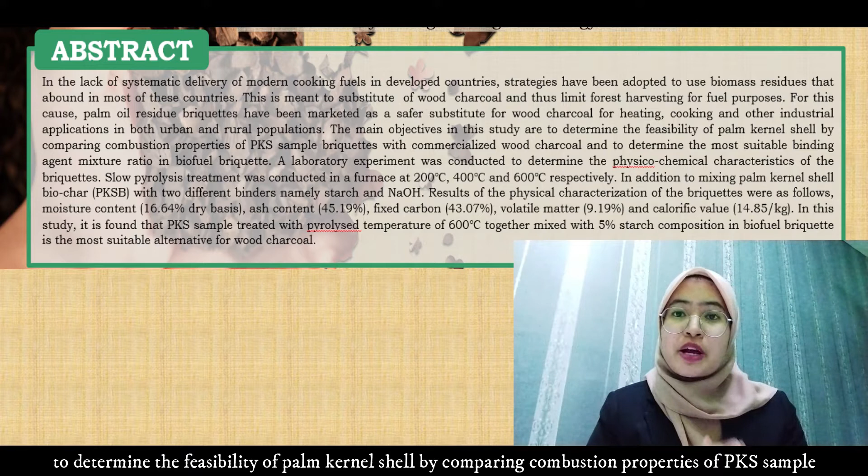Overall, the main objective of this laboratory experiment is to determine the feasibility of palm kernel shell by comparing combustion properties of the briquette sample with commercialized wood charcoal.

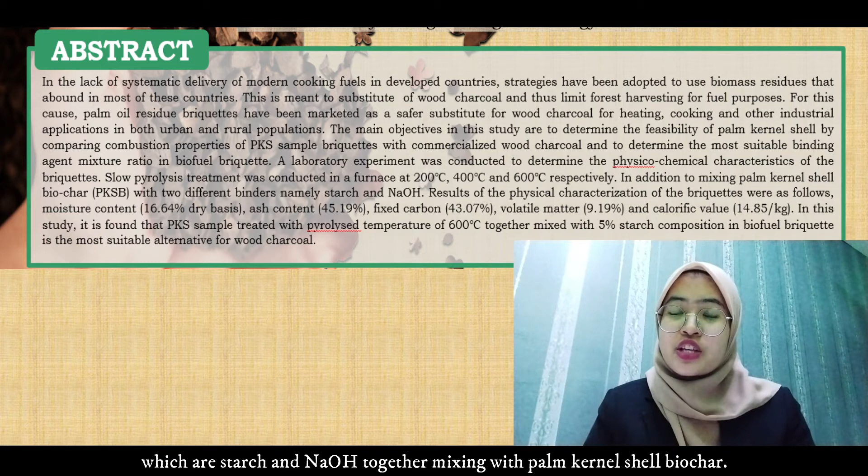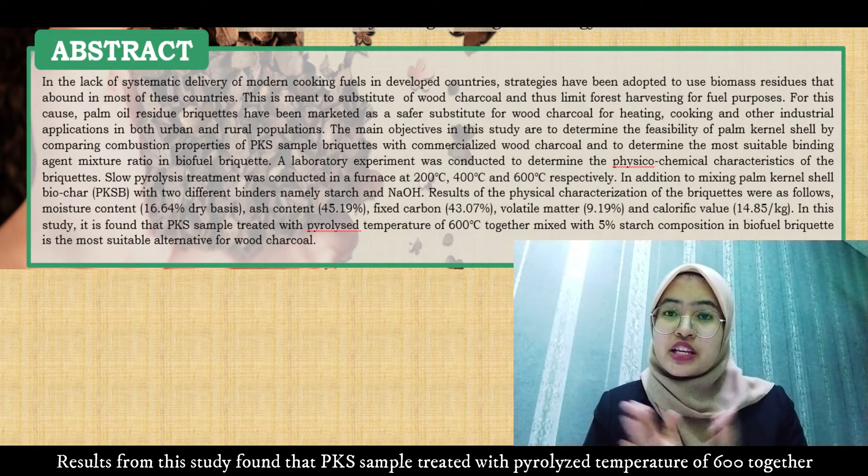In this experiment, I used two different binding agents, starch and sodium hydroxide, mixed together with palm kernel shell biochar. Slow pyrolysis was conducted in a furnace at temperatures of 200, 400 and 600 degrees Celsius. Results from this study found that the briquette sample treated with a pyrolyzed temperature of 600 degrees Celsius together mixed with 5% starch is the most suitable alternative to charcoal.

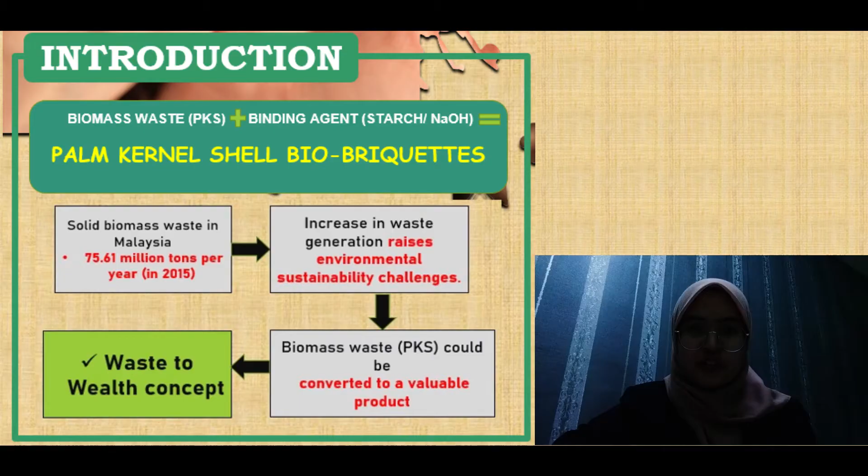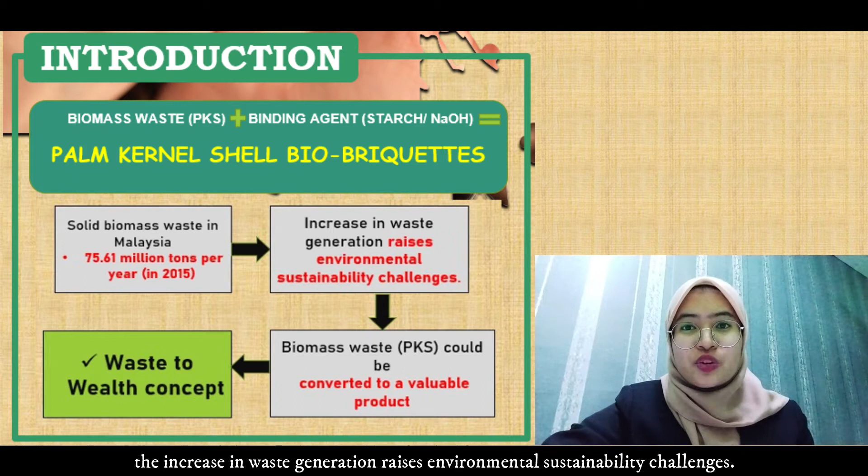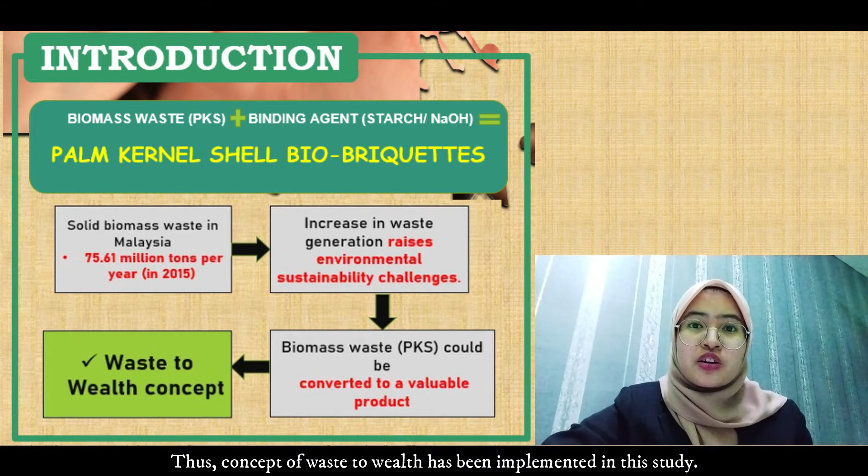For your information, during 2015 Malaysia produced 75.61 million tons per year of solid biomass waste in the palm oil industry. In relation to waste management and greenhouse gas production from solid biomass, the increase in waste generation raises environmental sustainability challenges. Therefore, biomass waste was converted to a valuable product, biofuel briquettes. Thus the concept of waste to wealth has been implemented in this study.

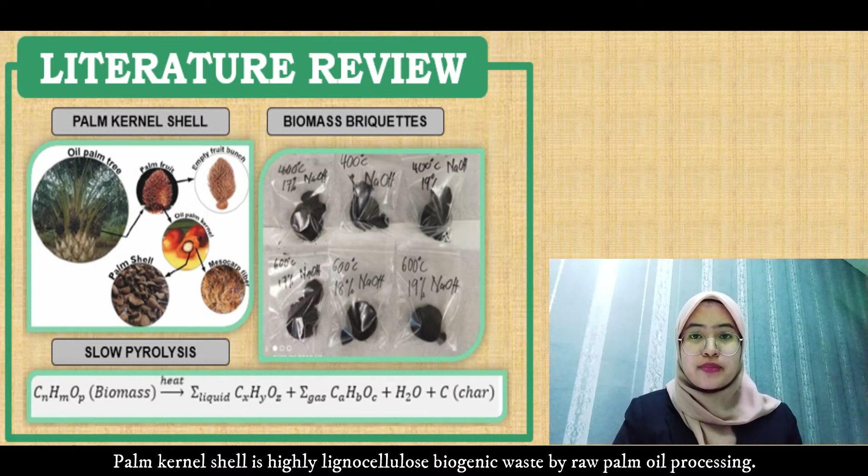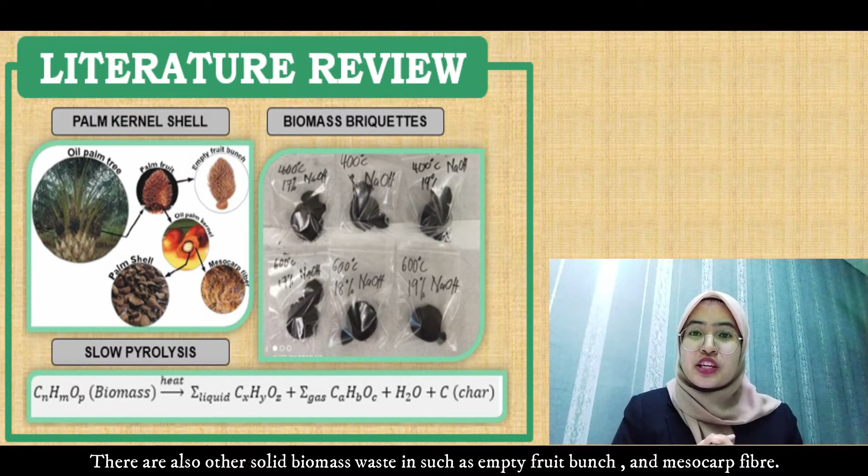Palm kernel shell is a highly lignocellulose biogenic waste from raw palm oil processing. As you can see in this figure, PKS is the hard part containing the palm kernel fruit, which contains the palm kernel seed. There are also other solid biomass such as empty fruit bunch and mesocarp fiber.

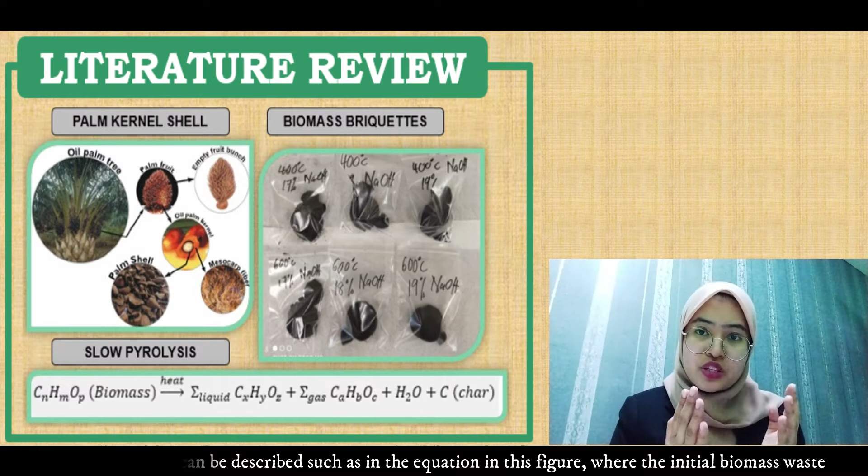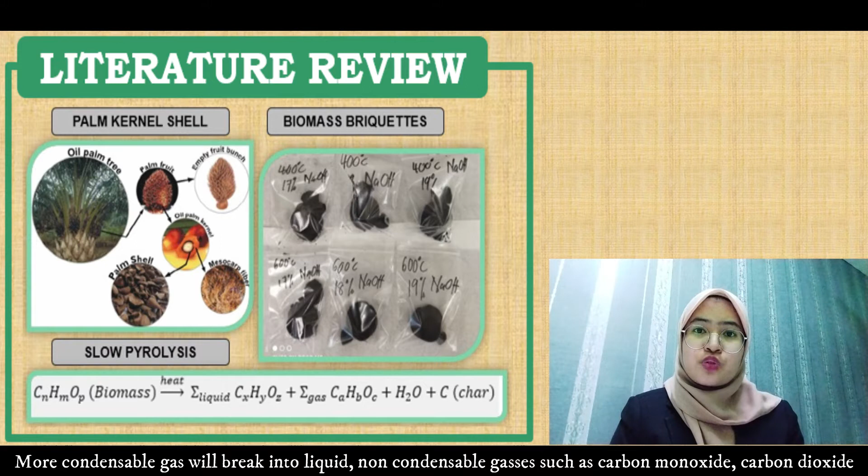Pyrolysis can be described as shown in the equation in this figure, where the initial biomass waste will be heated at a certain temperature and the initial pyrolysis product consists of solid char and condensable gas. More condensable gas will break into liquid, and non-condensable gases such as carbon monoxide, carbon dioxide and methane.

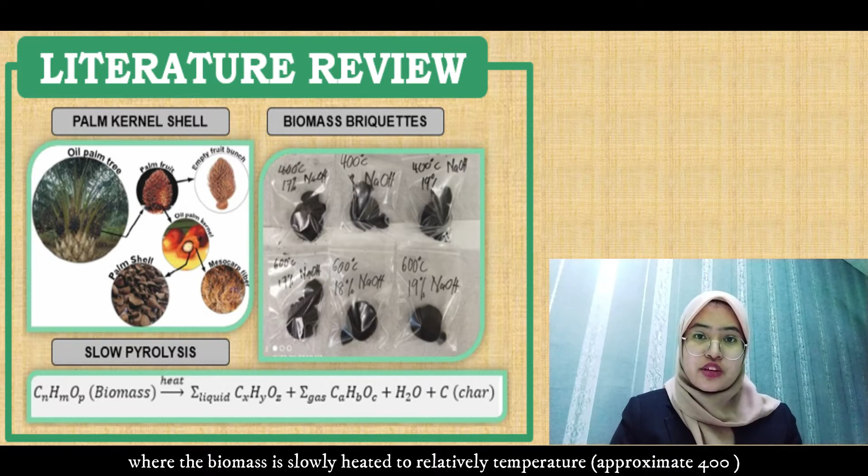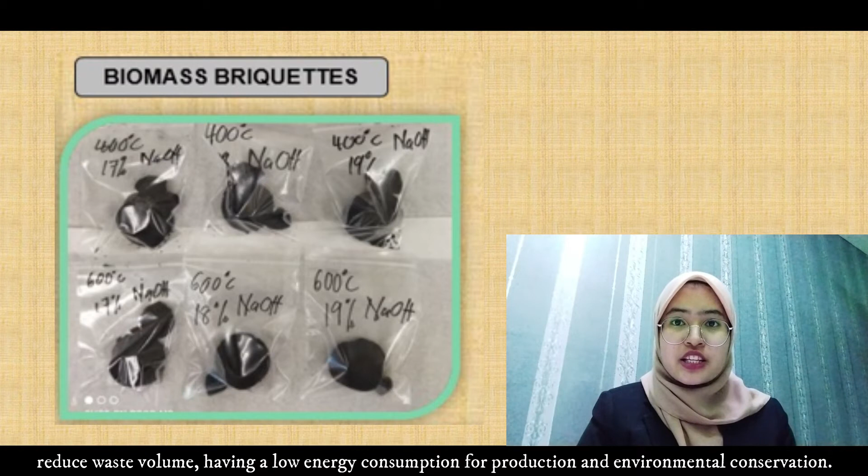Slow pyrolysis is described as occurring in the absence of oxygen, where the biomass is slowly heated to a relatively low temperature, approximately 400 degrees Celsius. The main advantages of briquetting include producing a high thermal efficiency solid fuel, reduced waste volume, lower energy consumption for production, and environmental conservation.

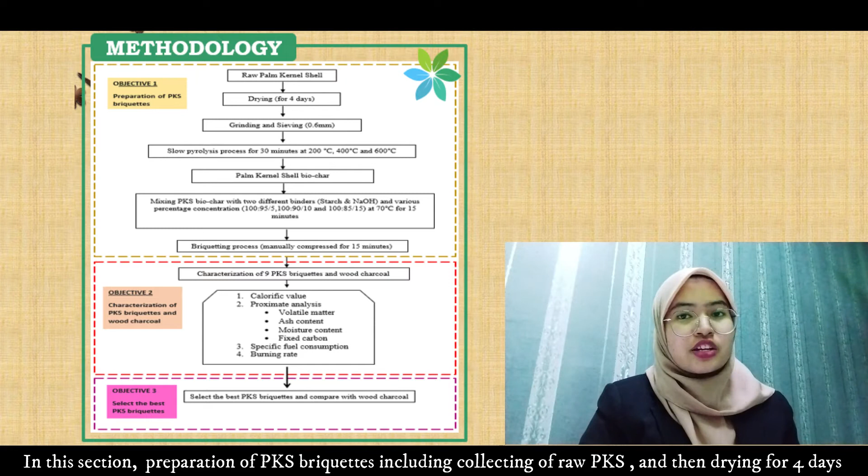In this section, preparation of PKS briquettes includes collecting raw PKS, drying for 4 days, grinding and sieving. Then slow pyrolysis occurs at 200, 400 and 600 degrees Celsius for 30 minutes to produce palm kernel shell biochar.

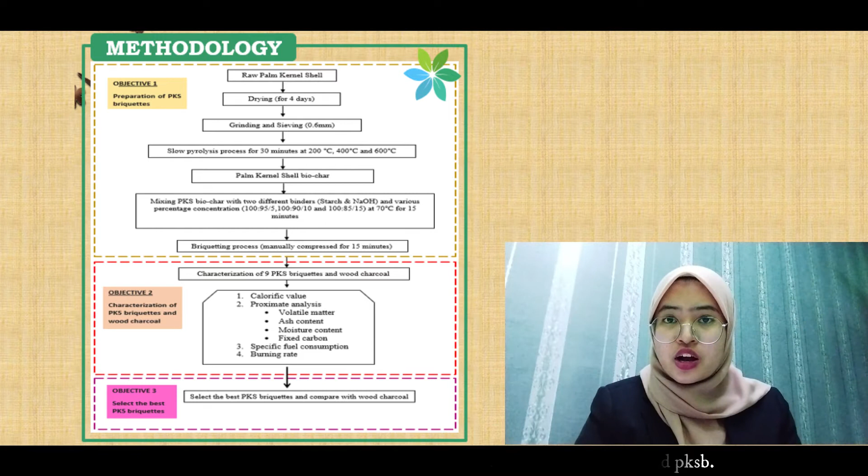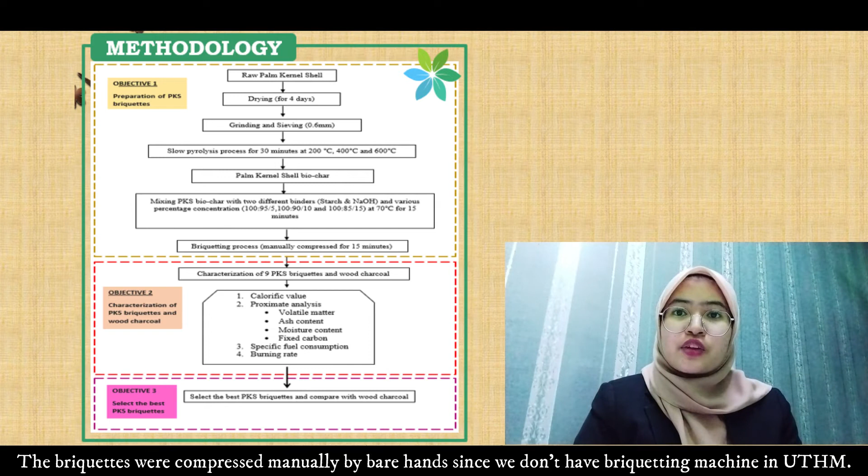Then PKSB will be mixed together with a binding agent, starch or sodium hydroxide, at compositions of 5%, 10% and 15%. The briquette is compressed manually by hand since we don't have a briquetting machine in UTHM.

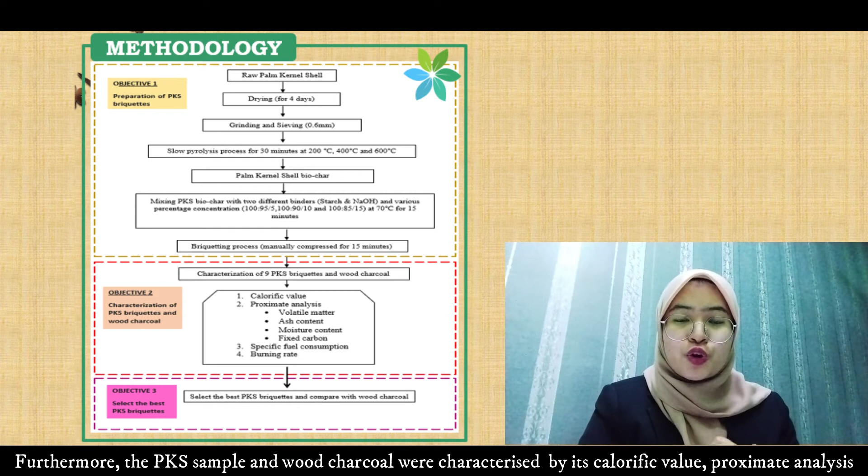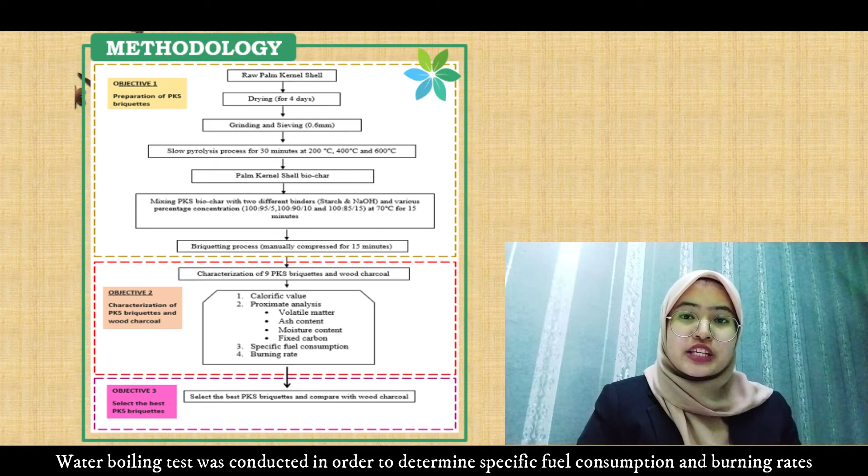Furthermore, the PKS sample and wood charcoal were characterized by calorific value and proximate analysis such as volatile matter, ash content, moisture content, and fixed carbon using thermal gravimetric analysis. Water boiling tests were conducted to determine specific fuel consumption and burning rate. Finally, the best PKS sample was selected and compared with wood charcoal.

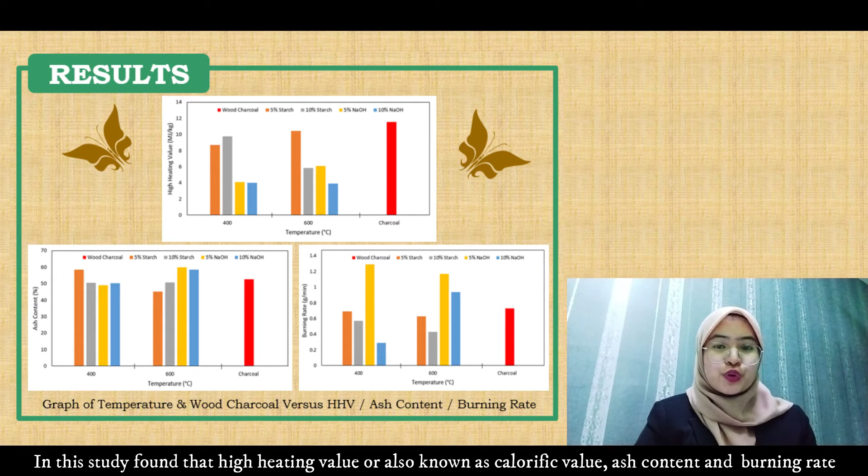This study found that high heating value, also known as calorific value, ash content, and burning rate play a significant role in determining the quality of biofuel briquettes.

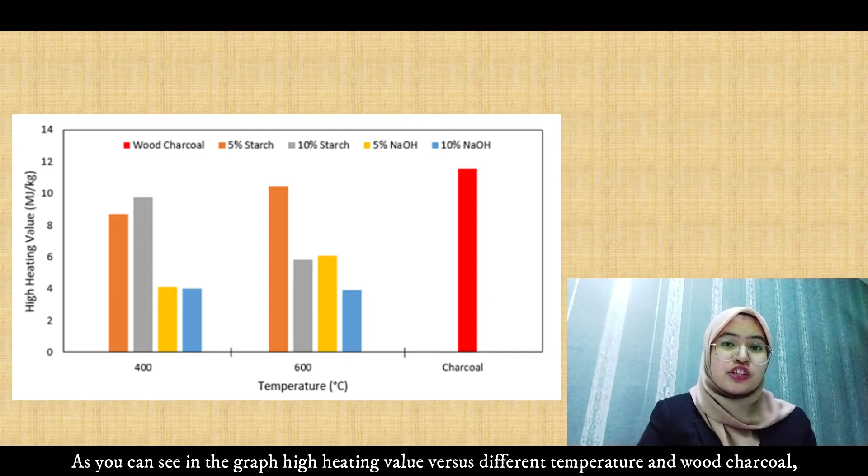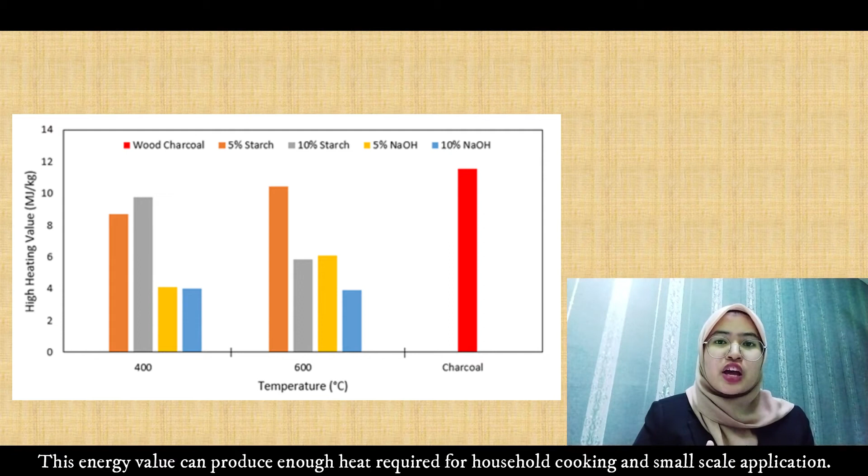This energy value can produce enough heat required for household cooking and small-scale applications. For the ash content graph, the sample at 600 degrees Celsius with 5% starch shows the lowest ash content value compared to the others, including wood charcoal. Ash has a significant influence on the heat surface of a fuel.

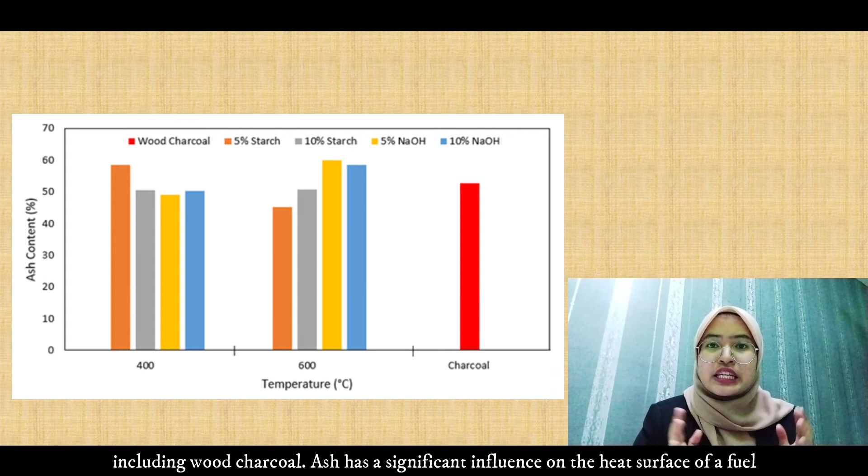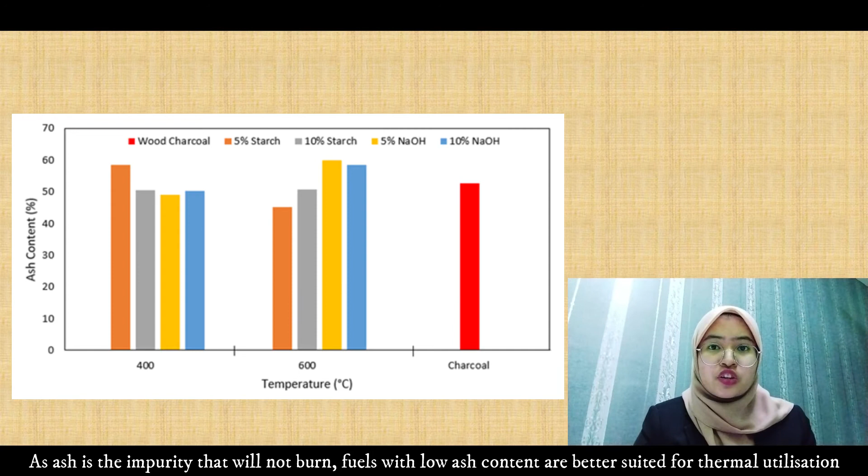As well as the diffusion of oxygen to the fuel surface during char combustion. Since ash is an impurity that will not burn, fuels with low ash content are better suited for thermal utilization compared with high ash content. According to Shaw et al. 2012, the higher the ash content, the lower its calorific value.

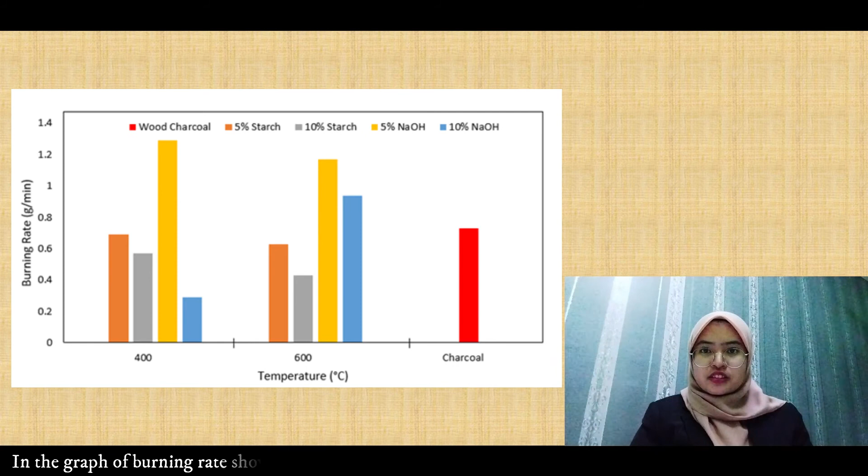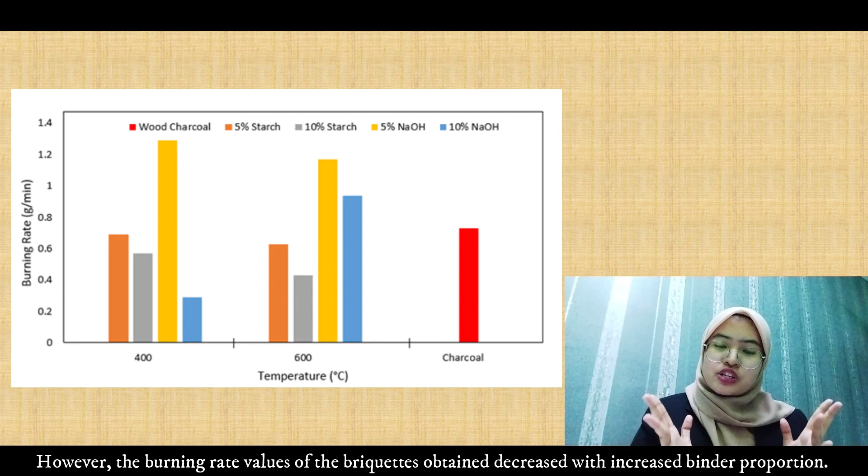The burning rate graph shows that burning rate decreases for most samples as temperature increases. However, the burning rate values of the briquettes obtained decrease with increasing binder proportion. This study discovered that the binding agents, starch and sodium hydroxide, prevented fast burning of the briquette.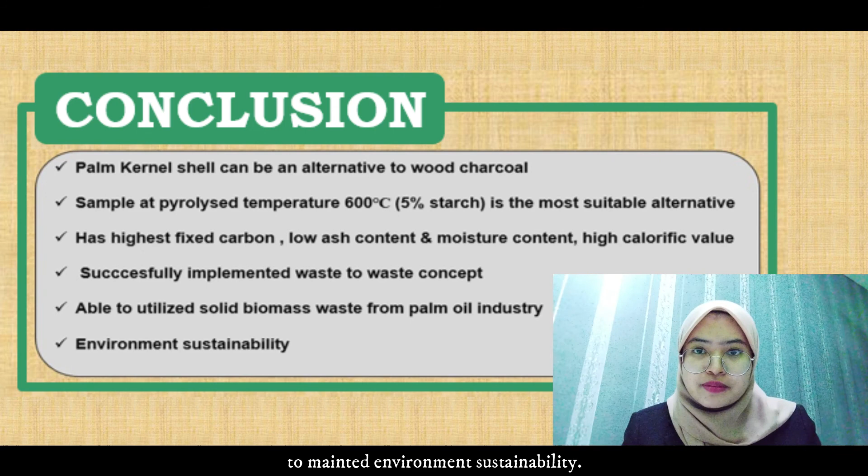Thus, in conclusion, palm kernel shell can be an alternative to charcoal. Besides, the PKS sample at 600 degrees Celsius with 5% starch was chosen as the most suitable alternative since it has higher fixed carbon, low ash content, low moisture content, and high calorific value. The concept of waste to wealth was successfully implemented in this study, while also helping maintain environmental sustainability.